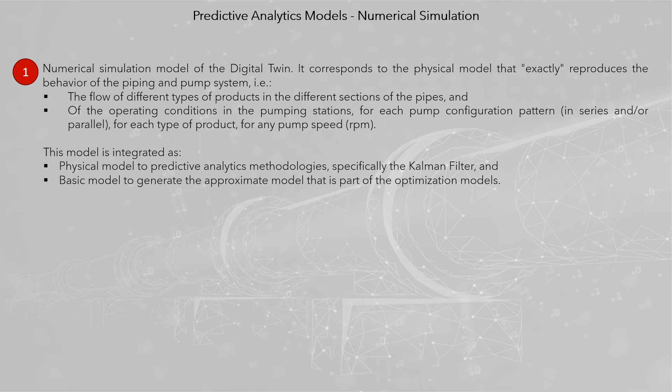This model is integrated as physical model to predictive analytics methodologies, specifically the Kalman filter, and as basic model to generate the approximate model that is part of the optimization models. The numerical simulation model produces matrices, or tables, that are the reference of the exact operation of the piping system and pumping stations, and these tables numerically represent functions of the energy consumed as a function of pressure, flow rate, product type, DRA injection, ambient temperature, etc.

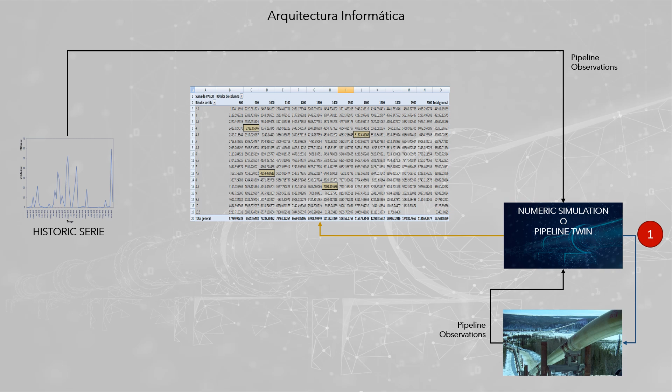Validate and correct advanced analytics models, mainly optimization models. State estimation models the prediction of the variables that represent the state of the system. These can be pressure, flow, RPM, roughness, density, etc., and physical model parameters, estimation of the parameters involved in the equations that represent the physical system, and which are subject to uncertainty. It is considered that the appropriate methodology is the Kalman filter, FK, including some of its variations and extensions. FK is, perhaps, the oldest and most robust methodology of hybrid predictive AI.

The numerical simulation model can be used to generate synthetic operation samples, as it is assumed to correspond to the exact representation of the system, and thus enrich the database, very useful in the case of young systems with few historical measurements.

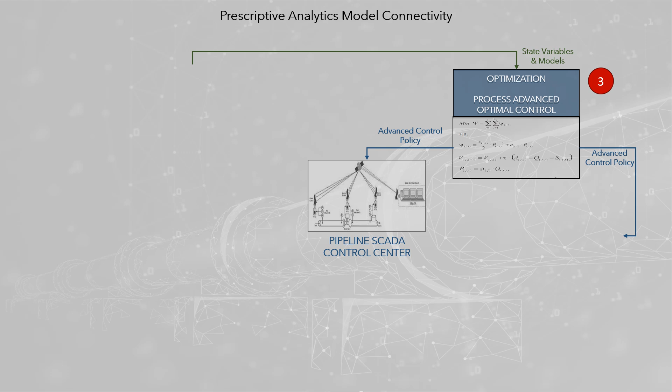It is considered that the appropriate methodology for these models is mathematical programming, also known as exact methods. The other optimization alternatives are discarded by not being exact; they may produce unfeasible solutions, and they don't guarantee to get the optimal solution, they leave money on the table. The results of the models, mainly the real-time ones, must feed the databases of the SCADA system, or distributed control.

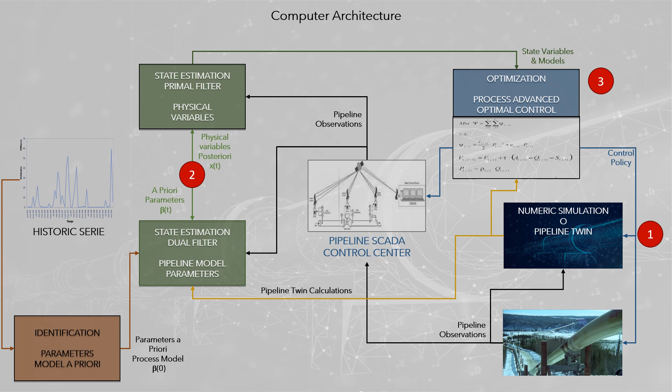The image presents the IT architecture of the proposed solution. The mathematical models will be analyzed later. The HAI methodology involves linking predictive and prescriptive artificial intelligence methods, to give rise to decision-making artificial intelligence.

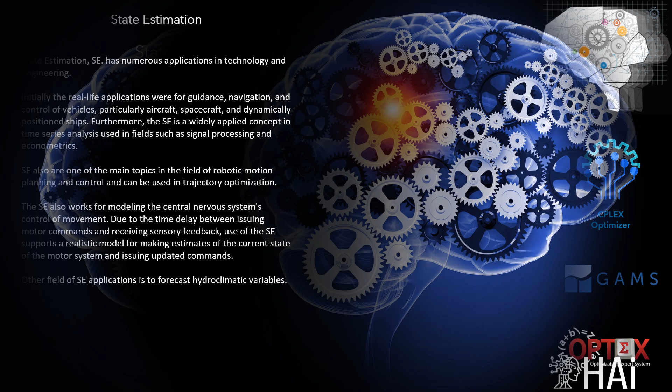Uncertainty dynamic systems. State estimation approach. State estimation framework. State estimation, SE, has numerous applications in technology and engineering. Initially, the real-life applications were for guidance, navigation, and control of vehicles, particularly aircraft, spacecraft, and dynamically positioned ships. Furthermore, SE is a widely applied concept in time series analysis used in fields such as signal processing and econometrics. SE is also one of the main topics in the field of robotic motion planning and control and can be used in trajectory optimization.

SE also works for modeling the central nervous system's control of movement. Due to the time delay between issuing motor commands and receiving sensory feedback, use of SE supports a realistic model for making estimates of the current state of the motor system and issuing updated commands. Another field of SE applications is to forecast hydroclimatic variables.

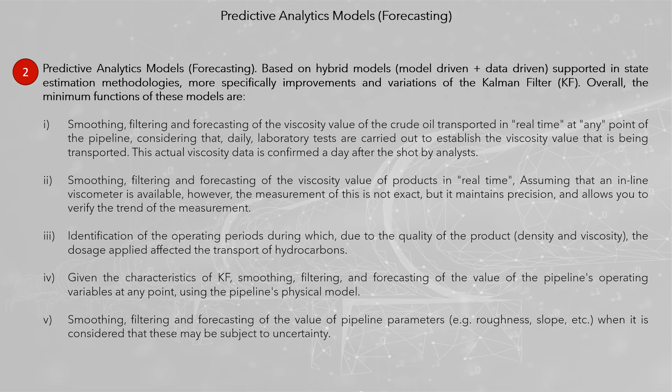Given the characteristics of KF, smoothing, filtering, and forecasting of the value of the pipeline's operating variables at any point, using the pipeline's physical model, and smoothing, filtering and forecasting of the value of pipeline parameters, e.g., roughness, slope, etc., when it is considered that these may be subject to uncertainty. As a general rule, it is considered appropriate to use an extended Kalman filter, or a dual Kalman filter, to simultaneously estimate state variables and the parameters of the equations.

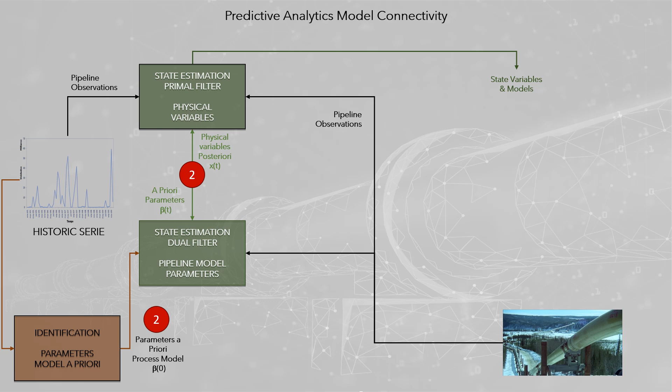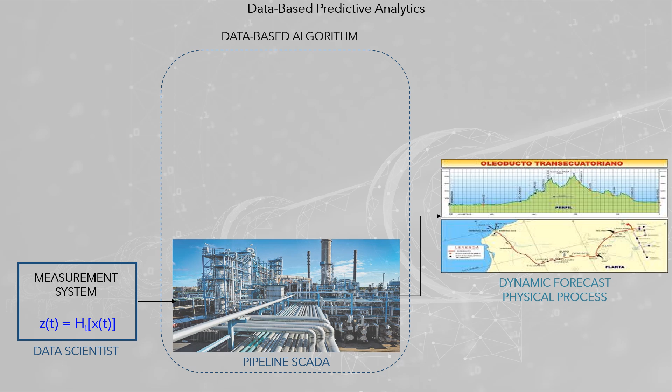Data-based algorithms only consider the database of observations, historical or synthetic, to determine the dynamic prognosis of the physical process. Normally, the related professional is a data scientist. Model-based models are based on the numerical simulation model, which must be fitted by means of algebraic expressions, to be expressed as a system of stochastic differential equations, or finite differences, or finite elements. This requires an expert in the field of interest, in this case fluid mechanics, mainly in the transport of petroleum products.

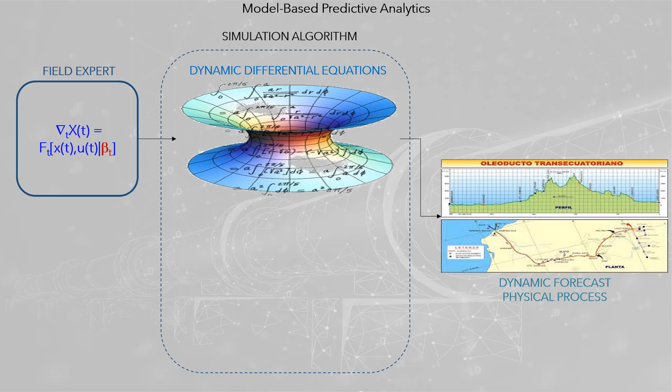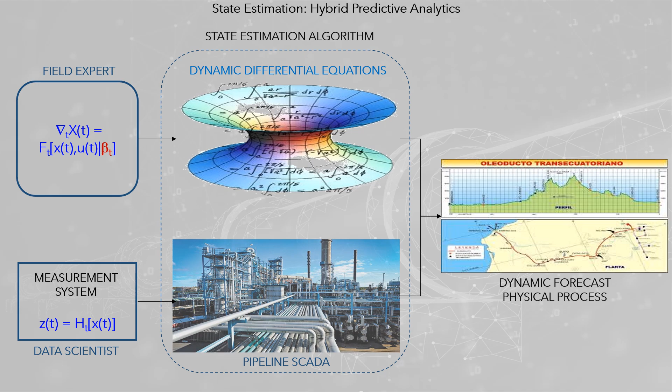The integration of the two approaches gives rise to hybrid predictive analytics, which can be considered as the appropriate method, that takes advantage of the mathematical knowledge of the physical system, and historical information. The most well-known method, and most used, for more than 65 years, is the Kalman filter. The state estimate describes the system based on state variables, characterized by discrete, empirical probability distributions, and dynamic, empirical, probability distribution functions that evolve over time.

Forecasting, predictions about the future, and filtering, predictions for the present. In a system under uncertainty, correcting the past may be just as important, if not more so, than forecasting the future and estimating the present. Examples of applications of the Kalman filter in pipelines are system monitoring, parameter calibration, leak detection, and maintenance following PHM methodologies.

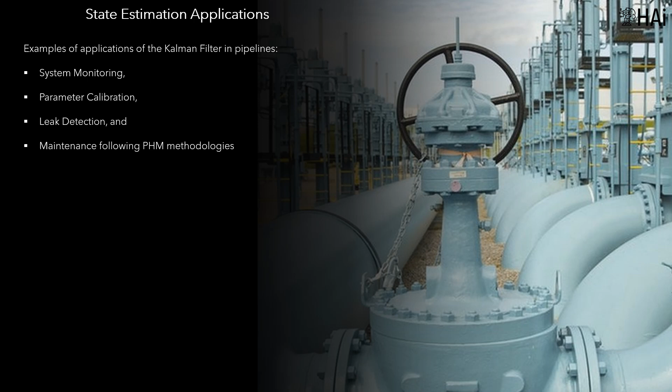Under the state estimation approach, an uncertain dynamical system, whatever it may be, can be conceptualized as consisting of two systems or components. Physical model. The system dynamics can be represented based on a set of differential equations, or differences, based on physical laws. Typically, these equations are referred to as the system model. The state in which the system is located is referenced by the vector of state variables, xt. The state equation, which defines the gradient of state variables, has a known structural function that depends on a set of parameters, beta t. The ut vector is related to control variables, which humans can manipulate to control the system.

Observation model. On the other hand, a measurement system, which observes the dynamical system by the variable zt, is related to the state variables by a vector function ht. The vector function ht can directly measure state variables, or measure transformations of these variables. Additionally, this observation system can include multiple measurement systems, from different sources. Together, the two components make up what in artificial intelligence is called a hybrid system, which combines information from the physical model with measurements from the observation system.

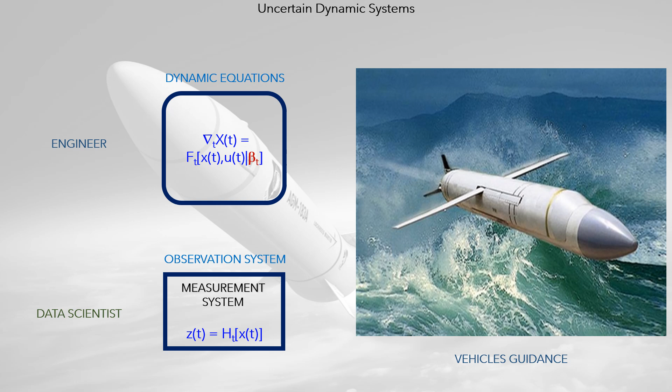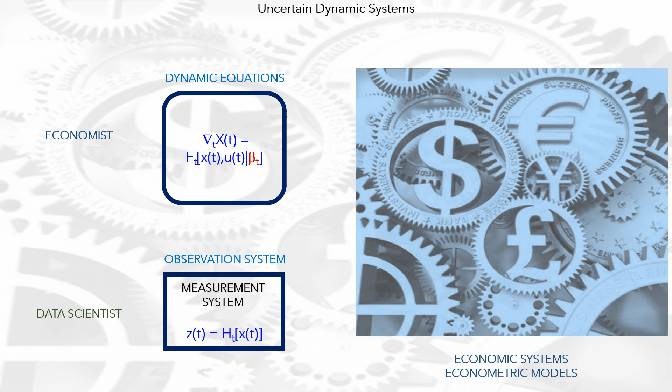Data-driven models are much easier to build, but they ignore scientific knowledge of the mathematical laws that govern the behavior of the system. By integrating the two models, state estimation becomes a robust hybrid method, capable of producing the best possible results, in terms of forecasting the state of the system. The concepts of state estimation are applicable to multiple types of systems. A few are mentioned below. Vehicle guidance, hydroclimatic variables, satellite imagery processing, economic systems, mass consumer products forecast.

The diagram presents the evolution of a dynamical system. At instant t-1, the value of the state variables is known, xt-1. Using the equations of system dynamics, the value of the state variables in t, xt, can be estimated. Iteratively, xt+1 can be used to calculate xt+2, and so on.

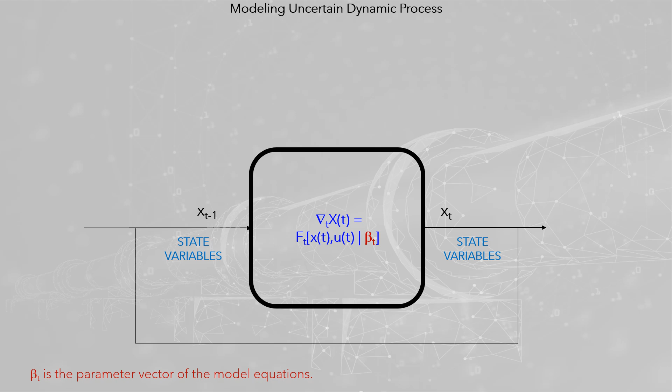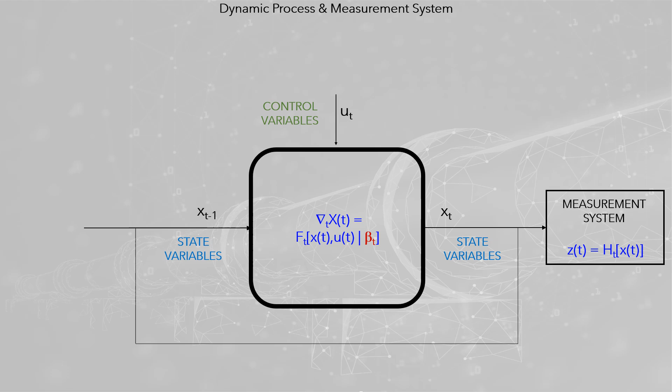To control the system, control variables must be included. The state variables are observed through the measurement system, which produces the zt variables that are an xt transformation. To optimize the process, it is desirable to use the dynamic programming approach, which includes an objective function, usually the cost of running the system.

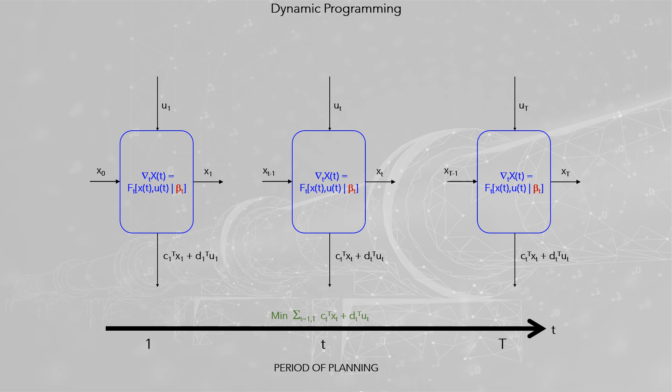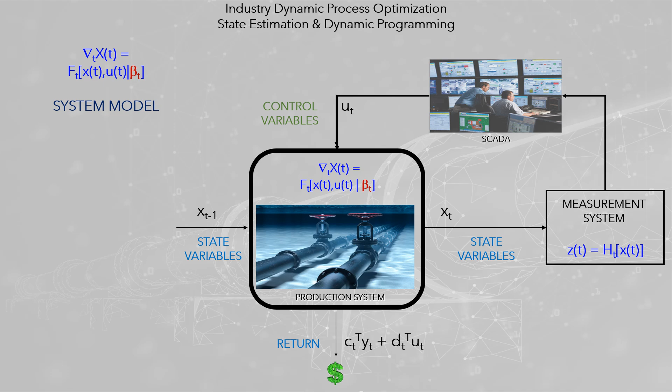Since optimization must be carried out in a planning horizon, which usually covers more than one period, all periods must be chained together, and an optimization problem must be formulated. The objective function is the sum of costs in all periods. Given the uncertain nature of the system, it is necessary to incorporate state estimation, to obtain accurate information of the state of the system, in probabilistic terms, and perform a stochastic dynamic optimization process.

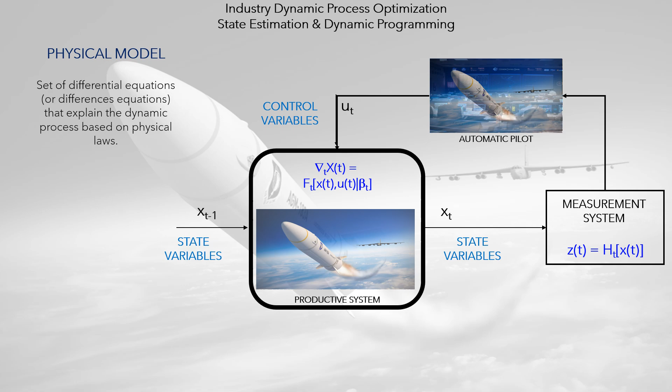Kalman was best known for his co-invention and development of the Kalman filter, a mathematical linear algorithm that since its origins has been widely used in signal processing, control and guidance systems, navigation and control. Subsequently, the Kalman filter has been used in almost all sectors of the economy. And it can be considered the best hybrid methodology of quantitative predictive artificial intelligence.

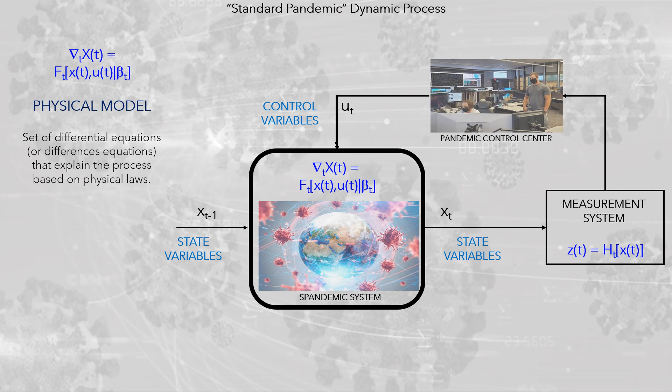The approach for the state estimation, SE, is supported on a conception of the stochastic processes, where the random variables are clearly differentiated from the measures, it being understood that the modeler has data of the measurement system that may be different from real values of the random variables.

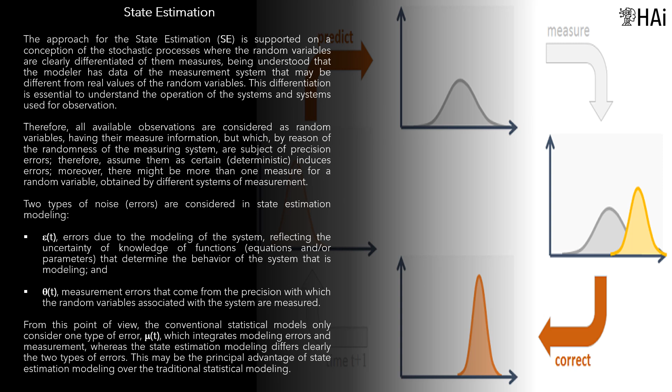Therefore, all available observations are considered as random variables, having their measure information, but which, by reason of the randomness of the measuring system, are subject to precision errors; therefore, assuming them as deterministic induces errors. Moreover, there might be more than one measure for a random variable, obtained by different sources. Two types of noise, or errors, are considered in state estimation modeling. A typical case of application of the Kalman filter is related to the guidance and control of vehicles.

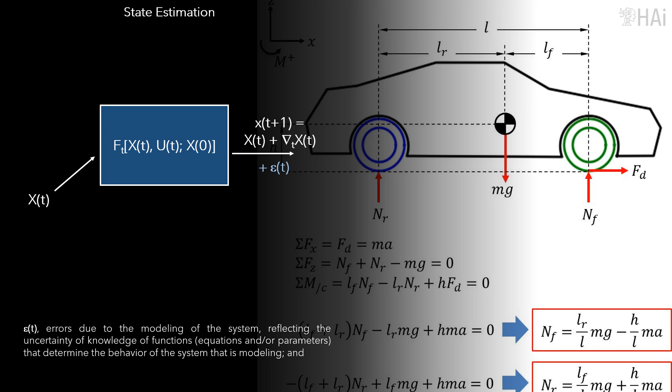Epsilon-t, errors due to the modeling of the system, reflecting the uncertainty of knowledge of functions, equations or parameters that determine the behavior of the system that is being modeled, and theta-t, measurement errors that come from the precision with which the random variables associated with the system are measured.

The conventional statistical models only consider one type of error, mu-t, which integrates modeling errors and measurement errors, whereas state estimation modeling clearly differentiates the two types of errors. This may be the principal advantage of state estimation modeling over traditional statistical modeling. Typically, the system modeling error, epsilon-t, is totally ignored, since the method is concentrated on the error in observed data. The historical data is assumed deterministic.

The conventional statistical models only consider one type of error, mu-t, which integrates modeling errors and measurement errors, whereas state estimation modeling clearly differentiates the two types of errors. This may be the principal advantage of state estimation modeling over traditional statistical modeling. Typically, the system modeling error, epsilon-t, is totally ignored, since the method is concentrated on the error in observed data. The historical data is assumed deterministic. And it's a big mistake. Uncertainty dynamic systems.

Rudolf Emil Kalman was a Hungarian-born American electrical engineer, mathematician, and inventor. Rudolf Kalman was born in Budapest in 1930. After emigrating to the United States in 1943, he earned his bachelor's degree in 1953 and his master's degree in 1954, both from the Massachusetts Institute of Technology. Kalman completed his doctorate in 1957 at Columbia University in New York City.

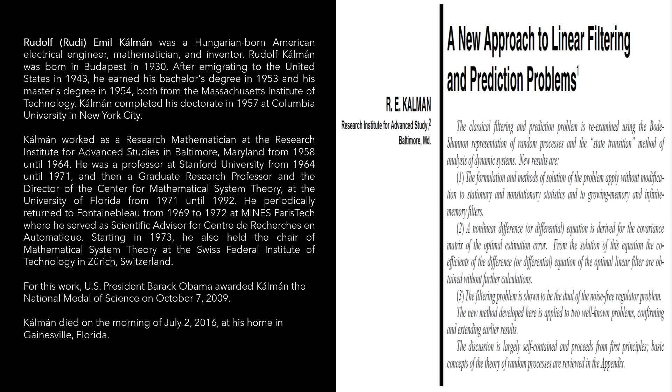Kalman was most noted for his co-invention and development of the Kalman filter, a mathematical algorithm that is widely used in signal processing, control systems, and guidance, navigation and control. For this work, U.S. President Barack Obama awarded Kalman the National Medal of Science on October 7, 2009.

Kalman filter theory. In statistics and control theory, Kalman filtering, also known as linear quadratic estimation, is an algorithm that uses a series of measurements observed over time, containing statistical noise and other inaccuracies, and produces estimates of unknown variables that tend to be more accurate than those based on a single measurement alone, by estimating a joint probability distribution over the variables for each time frame.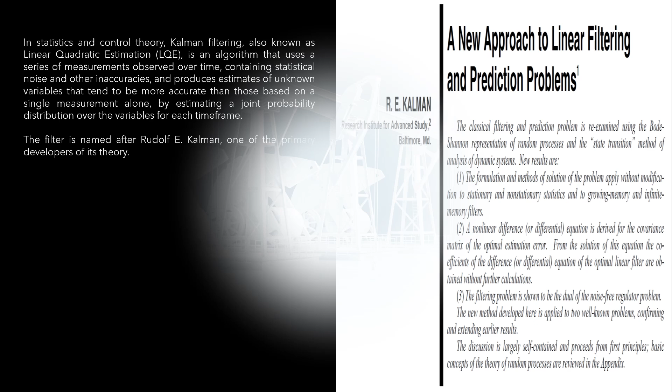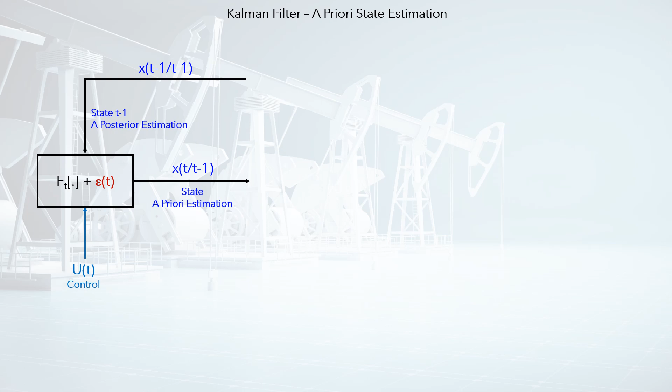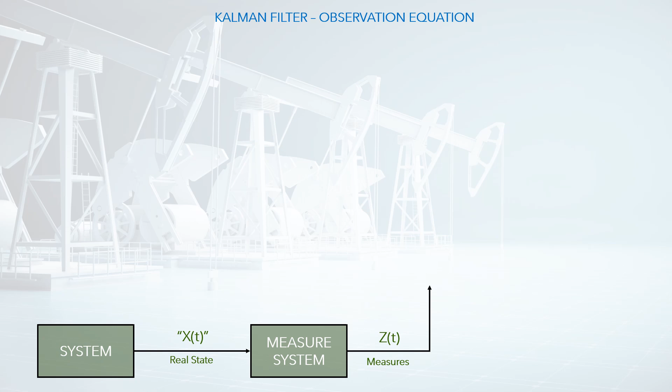The KF process has as its starting point the dynamic equation of state variables, which has as its input the a posteriori prediction in t-1 and the control variables in t. The result is the a priori estimate of the state variables for period t. On the other hand, the system that is being observed, through the measurement system, produces the actual measurements.

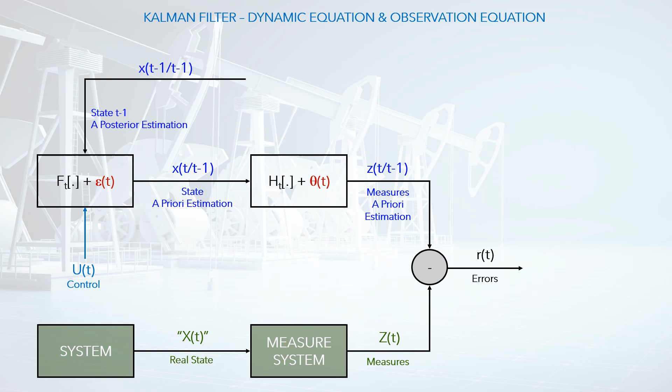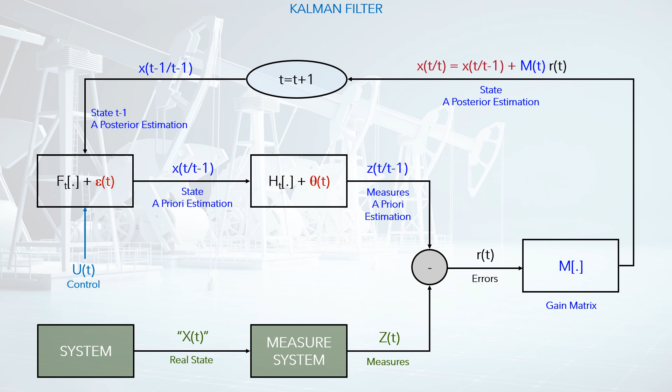The comparison between the a priori estimate of zt and the real value of zt produces an error, or innovation, that is used to make corrections in the state variables. This is done by means of the so-called gain matrix, M, which is a central part of the KF. The result is the a posteriori estimation of xt, which will be the starting point to carry out the process in the next period, t+1. We ignore the past as much as the future.

Of the present we generally ignore where we are. The stochastic processes where the random variables are clearly differentiated of their measures allow the modeler to improve knowledge of the past based on the evidence of the present. It can only be realized by a combination of forward and backward processes.

If t1 is the period for which you want to obtain the best estimator of the state variables, given the information received up to t, the relationship between t1 and t defines several types of process. Smoothing, t1 less than t, involves predicting a posteriori the state variable in the past t1, before t. Filtering, t1 equals t, involves the correction, filter, of the prediction of the state variables in t, while it reaches

the information. Forecasting, t1 greater than t, involves the prediction of the state variables for periods t1 after the present t. The last two functions are the most used; however, the prediction of the past makes perfect sense when we recognize that in the past we only had estimates of the state variable, because we never know its real value, which can be improved by processing the information coming later to t1.

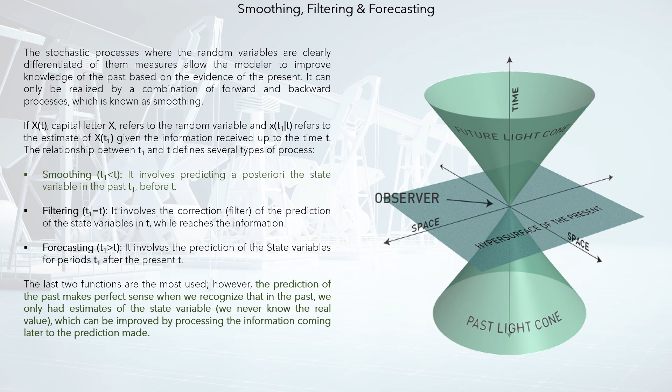State estimation models assume that we ignore the past almost as much as the future, and for the present we have a rough idea of where we are. As we acquire information, uncertainty in all directions must decrease.

Smoothing is fundamental in the process of estimating the epidemic state, because due to the type of process, it is necessary to reconstruct, in the best possible way, the history of the epidemic, since an inappropriate interpretation will give rise to bad decisions, since they are made based on measures that do not reflect the reality that is happening.

That case happened in Hubei, in the early days of the pandemic. Then, in the case of the pandemic, predicting the past could be much more important than predicting the future. An interesting example of the importance of predicting the past is the modeling of the COVID-19 epidemic.

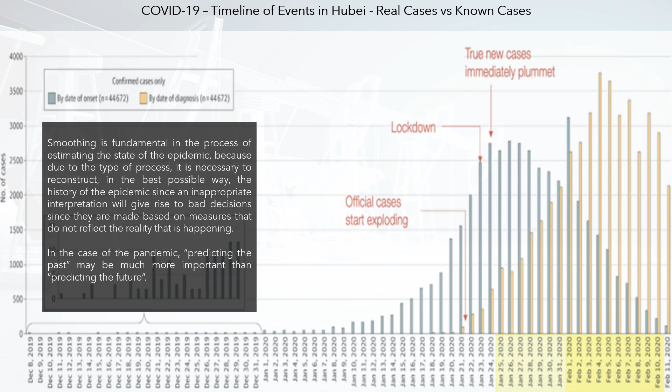Variations and extensions of Kalman filter. Considering that KF is oriented to linear dynamic systems, an effective algorithm for identifying an industrial or a natural process may be considered as a combination of the following methodologies: Kalman filter, extended Kalman filter, ensemble Kalman filter, dual Kalman filter, Bayesian model combination, and multiple Markovian state Kalman filter.

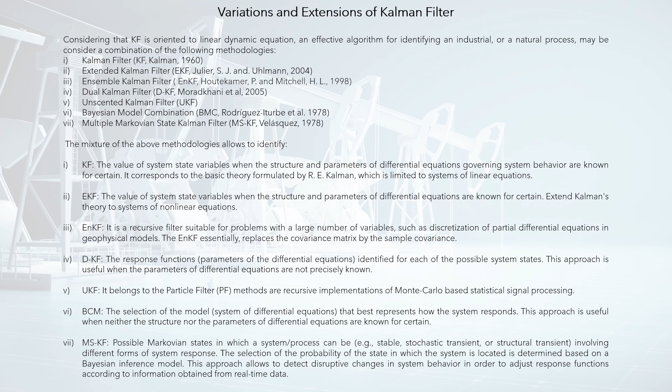Multi-methodologies Kalman filter. The advantages of the approach based on the integration of multiple methodologies of state estimation versus the classical methods are presented below. One of the limitations in the modeling of uncertain dynamic systems is that related to the hypothesis that the response function is known a priori, and structural changes of the system cannot be easily modeled.

The response function of a system reflects the way its internal structure works. Structural changes cause changes in the response function and cannot always be expected. Many of the changes that occur in the behavior of a system are consequences of unexpected events. Before these eventualities, schemes based on multiple system states, or similar, determine the moments in which structural changes occur, differentiating them from pure stochastic effects.

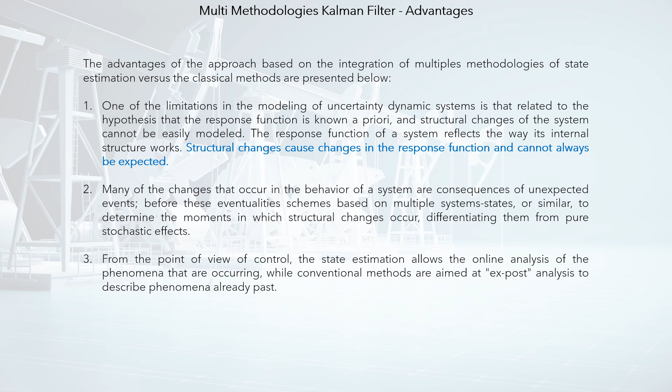From the point of view of control, the state estimation allows the online analysis of the phenomena that are occurring, while conventional methods are aimed at ex post analysis, to describe phenomena already past.

Dual state estimation of state variables and model parameters. When the true value of the parameters of the dynamic equation of state variables is unknown, it is necessary to use a variation of KF, like EKF. KF estimates the value of system state variables when the structure and parameters of differential equations are known for certain. EKF extends Kalman's theory to systems of nonlinear equations.

EnKF is a recursive filter suitable for problems with a large number of variables, such as discretization of partial differential equations in geophysical models. The EnKF essentially replaces the covariance matrix by the sample covariance.

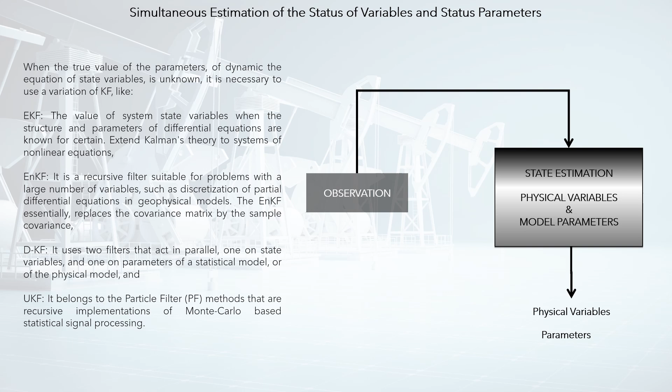DKF uses two filters that act in parallel, one on state variables, and one on parameters of a statistical model, or of the physical model, and UKF belongs to the particle filter, PF, methods that are recursive implementations of Monte Carlo-based statistical signal processing.

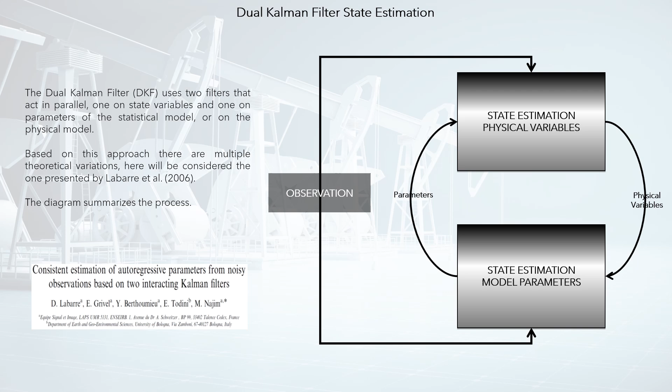When the true value of the parameters of the dynamic equation of state variables is unknown, DKF uses two filters that act in parallel, one on state variables, and one on parameters of a statistical model, or of the physical model. Based on this approach, there are multiple theoretical variations. Here will be considered the one presented by Labarre et al.

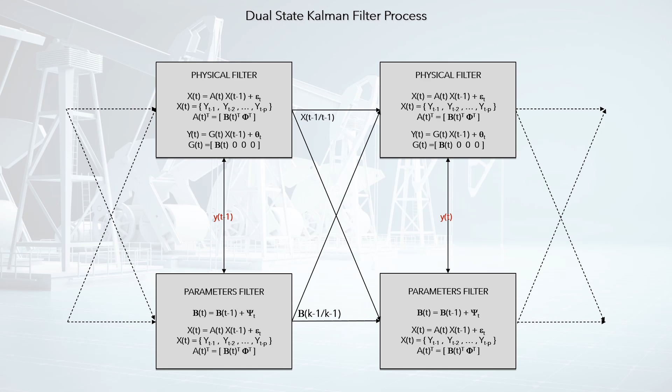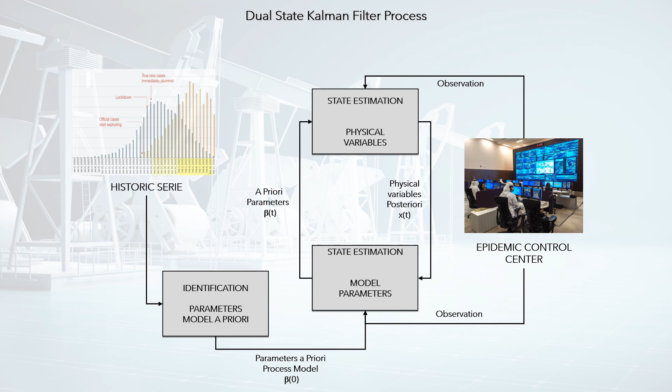The diagram summarizes the process. The diagram shows the connectivity of the standard Kalman filter. The DKF includes an additional filter on the parameters, in order to simultaneously correct state variables and parameters of the dynamic equations.

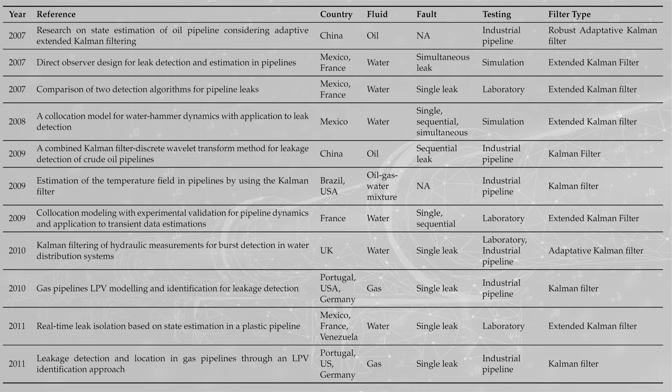Like Herbert Simon, Hypothalamus Artificial Intelligence believes that computer-based mathematical modeling is the greatest invention of all times.